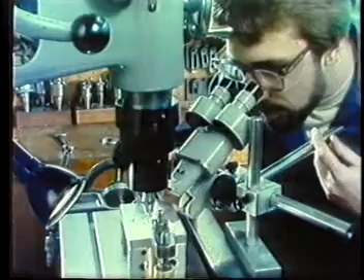Quality and productivity are the concerns of every industry, from the plants that produce our paper products to the companies that manufacture precision machine tools. All are affected by safety, quality, and productivity.

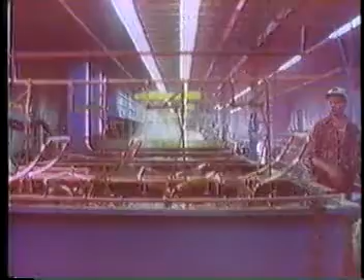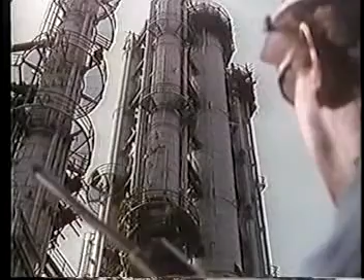Modern industries depend on the ability to measure and control scores of variables that directly affect plant safety, product quality, and operating efficiency. All major industries, from automotive and aerospace to the food and drug industries, rely on precise and reliable control systems. Production systems and their equipment vary greatly from one industry to another, and so do their control systems. A nuclear power plant must pay particular attention to plant safety, as must a steel mill.

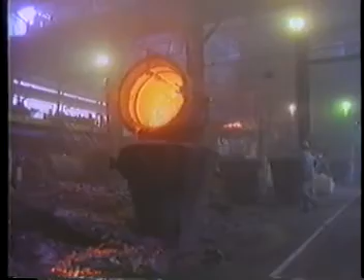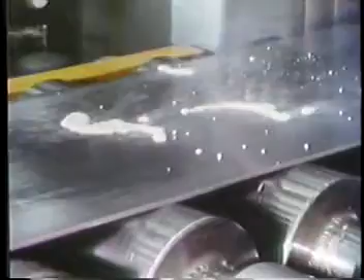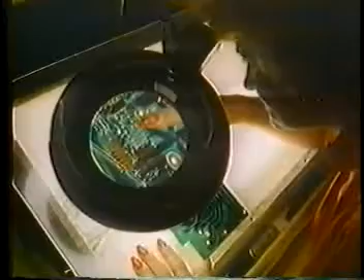A pharmaceutical company must maintain rigid quality control to ensure pure and safe products. These and other industries each have dozens of different production lines with rigid specifications for each and every product, requiring close control of many variables. In all industries, whether a plant is large or small, the measurement and control of manufacturing variables is the key to successful operations. The systems controlling these variables are known as automatic control systems.

The program, Basic Automatic Process Control, showed how a small chemical company used control systems to maintain the quality of its product while increasing production. Let's look at the manufacturing process and control systems it used.

The company's chief product was a specially blended liquid, which was sold in bottles. Raw materials were mixed in an inline mixer and passed through a heat exchanger, where the mixture was heated with steam to 80 degrees. This was the temperature required to ensure proper blending of the ingredients.

If, for some reason, the temperature rose above 85 degrees, one of the ingredients became overactive and the product was off specification. On the other hand, if the mixture was allowed to cool below 75 degrees, blending was incomplete and the product had to be reprocessed or thrown out.

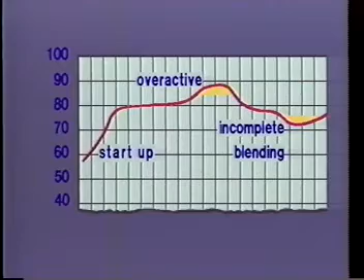In short, good product quality required that the temperature be maintained at 80 degrees, plus or minus 5 degrees. After leaving the heat exchanger, the blended product then flowed through a pipeline to two automatic bottling machines.

Temperature control was first attempted with an on-off controller, but on-off control quickly proved to be totally inadequate for the continuous process. The company then installed a proportional-only controller. The gain of the controller was adjusted so the control valve admitted the right amount of steam to the heat exchanger to maintain the desired temperature.

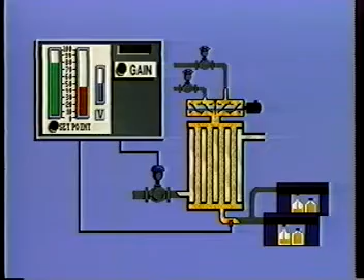This controller worked well until one of the bottling machines was started or stopped. These load changes to the system created temperature offsets, resulting in a loss of product due to temperatures that were either too low or too high.

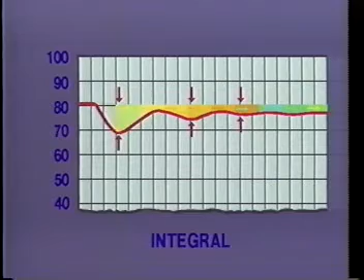An integral unit was then added to the controller. By responding to the duration of the temperature error, the integral unit detected that the error was still present sometime after the load change. The signals from the integral and proportional units combined to correct the error or offset.

Although the proportional integral controller worked well to eliminate offsets, its output signal did not react quickly enough to reposition the valve during sudden load changes. Each time a bottling machine was started or stopped, some product was lost.

A derivative control unit was then added to the controller. This unit could detect the rate of temperature change and cause additional valve movement whenever the temperature changed rapidly.

The control instrument finally used in the plant was a 3-mode controller known as a PID controller. It contained proportional action, which responded to the size of the error to maintain the system under most conditions.

Integral action, which responded to the average error over a period of time to compensate for load changes. And derivative action, which responded to the rate of change in the error signal to speed up valve action when fast load changes occurred. With the PID controller, the temperature of the product in the heat exchanger was maintained within the required limits.

The control system enabled the company to keep the high quality of its product, while it increased production by adding more production lines.

The story didn't end there, however. The product was so successful that soon other companies began producing and selling competitive products, and some of the competing products were priced below that of the original.

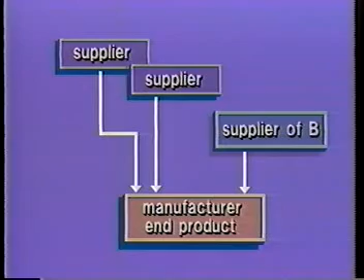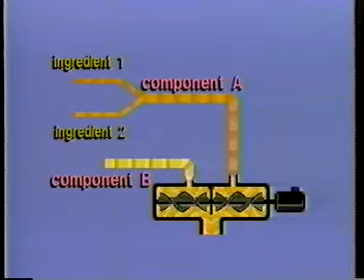This was their rationale. The company's product was made of two components, A and B. These came from two different suppliers, and they were mixed together in a blending tank before being added to the continuous reactor. Component A, however, was itself a mixture of two other ingredients, which an intermediate producer combined and sold by the tank load. If the company could make this mixture in-house, it could eliminate the extra expenses paid to the intermediate producer.

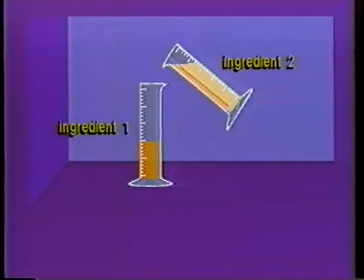The recipe for making component A was simple. It required 2 parts of one ingredient for each part of the other, a 2-to-1 ratio. Because the recipe was so simple, eliminating the middleman in the supply chain meant only a minor modification to the plant was needed. This is what the modification looked like: an additional pipeline was installed that intersected with the line that formerly carried component A into the mixer and heat exchanger. The two ingredients were then mixed together in the pipeline to form component A.

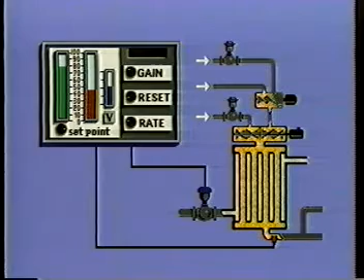The only problem was that the plant had to somehow make sure that twice as much of the second ingredient always flowed into the pipe's intersection. A ratio controller was used to make sure that happened.

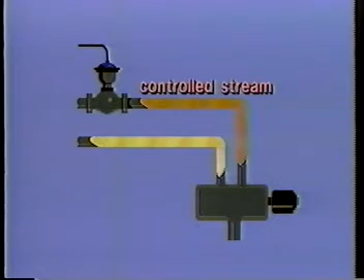Ratio control can be accomplished by controlling both streams, or by using one control stream and one uncontrolled stream. When using an uncontrolled stream, only one of the two flows entering a system is controlled by a ratio controller. It doesn't matter if the other flow varies, so this uncontrolled stream is known as the wild stream. In ratio control, the only thing that matters is that the control stream matches the wild stream in the desired ratio. In this case, the volume of product in one stream must be twice as much as in the other.

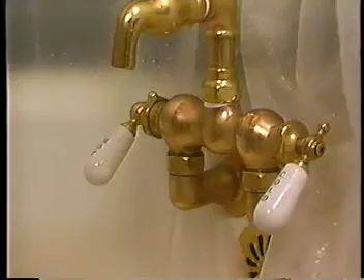Ratio control is a lot like staying comfortable in a shower. Both hot and cold water valves are opened and then adjusted to produce the desired water temperature. But if someone in the next apartment turns on the cold water, the flow of cold water into the shower suddenly decreases. To avoid scalding himself, the bather quickly reduces the flow of hot water into the shower head. In effect, he is trying to maintain the proper ratio of hot to cold water.

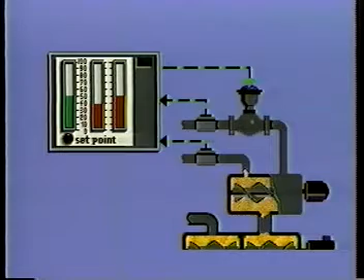A ratio control system accomplishes a similar adjustment automatically by using two sensors, a ratio controller, and one valve. A sensor in the wild stream transmits a signal proportional to the flow rate to the ratio controller. The flow rate in the controlled stream is compared to the flow rate of the wild stream, and the ratio controller maintains the controlled flow rate to give the desired ratio for the mixture. This desired ratio is determined by adjusting the set point on the ratio controller. A high ratio means that the difference in the flow rates is great. A low ratio means that the difference is smaller.

Here is how ratio control worked in the chemical plant. The flow of ingredient 2 into the process was continuous but variable. The flow of ingredient 1, however, was carefully controlled so that its flow was always half that of ingredient 2. For the ratio to be controlled, it really didn't matter what the absolute flow rate of the materials into the process was. It only mattered that this 2-to-1 ratio was always maintained.

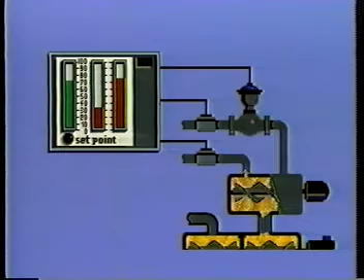The addition of the new ratio controller and an additional pipeline was not a very costly modification to the plant, and soon the company was enjoying the benefits of reduced materials costs. However, energy was another major concern, since energy costs were an appreciable portion of the total production costs. This made the cost of producing steam for the process a major expense, so the company next turned its attention to reducing energy consumption. Although the potential savings were not as great as those achieved in materials costs, the plant engineers knew they could conserve energy if they could reduce the amount of steam needed in production.

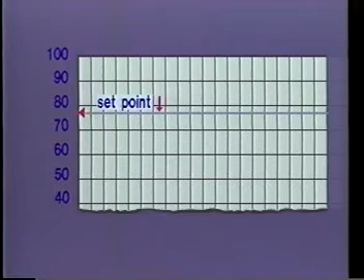One way to reduce steam requirements would be to lower the set point of the product temperature. However, this could only be done if the variations in temperature could be reduced. This temperature record shows why. First, the temperature record shows that the product temperature varies plus or minus 5 degrees. The set point is 80 degrees, and the temperature can go as low as 75 degrees without affecting product quality. But if the temperature could be controlled at plus or minus 2 degrees, the set point could be lowered from 80 degrees to 77 degrees. Product quality would not be affected, since the temperature would not fall below the lower limit of 75 degrees.

The plant engineers knew they could conserve energy and reduce costs if they could maintain the temperature in the heat exchanger at 77 plus or minus 2 degrees. Before they could do this, they needed to know what caused the temperature to change as much as it did.

Here is what they found out. The heat exchanger used in the process was a typical shell and tube type, in which the product flowed in tubes through a steam jacket or shell and was heated by steam within the shell.

The main cause for temperature variation was changes in pressure of the steam supply. As steam pressure increased, steam temperature also increased, and as pressure dropped, temperature dropped. Pressure changes occurred when other production lines in the plant increased or decreased their use of steam. When other lines decreased their use, the pressure of the steam supply increased.

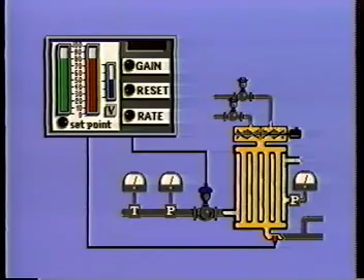The engineers felt that this was an ideal situation for cascade control. Cascade control involves using the output of one controller to provide an input to adjust the set point of a second controller. This second controller is part of a feedback loop inside the feedback loop for the primary variable.

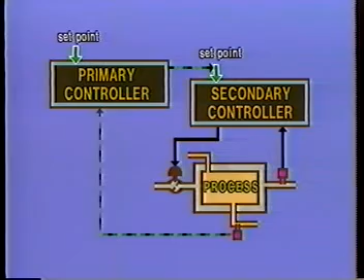Here is how the chemical company used cascade control to keep the product temperature closer to the set point. The steam pressure in the heat exchanger shell was monitored, since it rose or fell almost immediately if there was a change in the steam supply. The output of this pressure sensor went to a controller that caused the steam valve to open or close in proportion to the shell pressure.

This was the inner or secondary feedback loop. The outer or primary feedback loop still responded to the temperature of the product in the heat exchanger. However, instead of directly positioning the steam valve, the output of the primary controller was used to adjust the set point of the secondary controller. The secondary controller then positioned the valve.

Under most circumstances, the secondary loop was doing most of the work involved in maintaining a steady product temperature. Its major responsibility was to minimize disturbances in the steam line. In contrast, the primary loop's major control action occurred whenever there was a disturbance or load change in the product, for it was then that the set point of the secondary controller had to be changed.

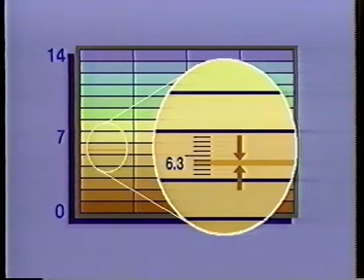However, while most of the company's engineers had turned their attention to saving energy, one enterprising young engineer had not. He was looking for further reduction in materials costs and was concentrating on component B. For this component, a precise pH value was necessary for good product quality. pH is a measure of the acidity or alkalinity of a substance. For component B, the ideal pH was 6.3, but a pH in the range of 6.2 to 6.4 was acceptable. If the material was too acidic or had a pH lower than 6.2, the product would become lumpy.

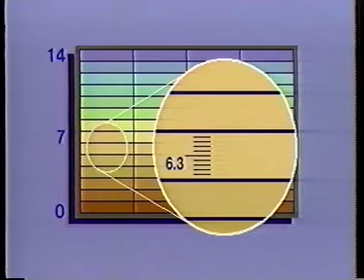If the raw material was too alkaline, with a pH higher than 6.4, the product would separate into layers after it was bottled. The supplier of component B had provided it within the acceptable range, but the enterprising young engineer soon found out it would be far more economical for the company to buy raw material with a pH in the range of 6.2 to 6.8.

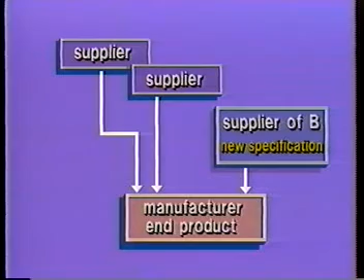All that was needed was a way to lower the pH when necessary. He determined this could be done quite easily. First, a standard pH instrument could be used to determine the exact pH of component B. Then, if the pH was above 6.3, acid could be added until the pH registered 6.3. Since the acid required was inexpensive and only small amounts would be needed, the company would be able to pay off the cost of minor plant modifications quickly.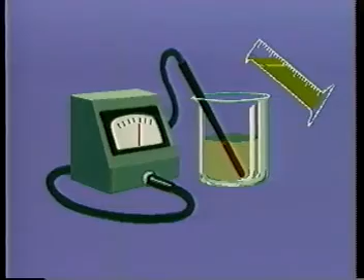The modifications needed required a control system to monitor and adjust the pH of component B. Once the president of the company heard about this opportunity to make further savings in materials costs, he quickly approved the plans for modifying the plant and the supply of component B.

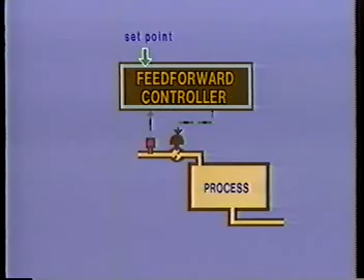The control system the company chose as part of this modification was a feed-forward control system. In feed-forward control, a disturbance is detected before it has a chance to affect the process, and corrective action is taken before the disturbance creates an upset in the process. This type of control is known as feed-forward because it takes corrective action before a disturbance affects the process.

In contrast, feedback control takes corrective action only after a disturbance is detected in the process. Feedback control is something like driving a car down the road by looking only through the rearview mirror. After the car has bounced off a curb, the driver turns the wheel after observing what he has just hit.

Feed-forward control is more like the usual manner of steering. Objects can be dodged before a collision occurs, since they are spotted through the windshield.

In the chemical plant, raw material was going to be accepted with a pH in the range of 6.2 to 6.8. The process required the pH to be between 6.2 and 6.4, so any variation in pH above 6.4 was a disturbance to the system that had to be corrected by adding an acid.

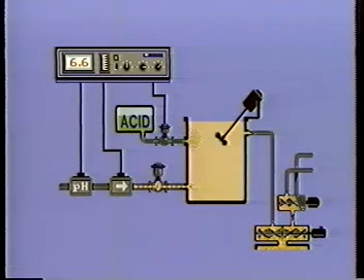With feed-forward control, it was possible to monitor the disturbance variables before they entered the reactor. A pH instrument was used to monitor pH, and a flow sensor was used to measure the flow. The feed-forward controller calculated the amount of acid needed to control pH at a desired value based on flow and/or pH disturbance. The output of the feed-forward controller positioned the valve to admit the required amount of acid to the stream to maintain the pH.

In this configuration, when the pH of component B was 6.4, only a small amount of acid entered the flow. When the pH was 6.6, acid entered the flow at a greater rate. And when the pH was 6.2 or 6.3, no acid was added. Also, when the flow rate changed, the amount of acid added was adjusted to accurately maintain the pH.

For two days after startup, the new system performed exactly as planned. The pH sensor worked, the flow sensor worked, and the valve adding acid opened and closed as necessary. The quality of the finished product was as high as ever. But on the third day, something went wrong.

The product bottled that day stratified, or separated into layers. That meant the product was too alkaline, which in turn meant that not enough acid had been added to maintain the pH level. Worst of all, it meant that the entire day's production had to be thrown out.

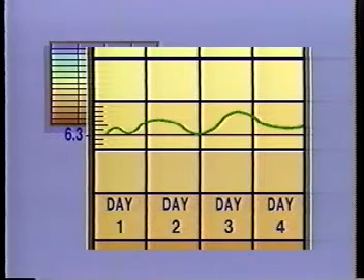The numbers used to describe the acidity or alkalinity of a substance follow an ordinary number scale, ranging from 1 to 14. This would lead one to expect that a substance of pH 2 would be twice as alkaline as a substance with a pH of 1.

In fact, the substance with a pH of 2 is actually 10 times as alkaline as the substance of pH 1. Each number on the pH scale indicates a 10-fold change in the acidity or alkalinity.

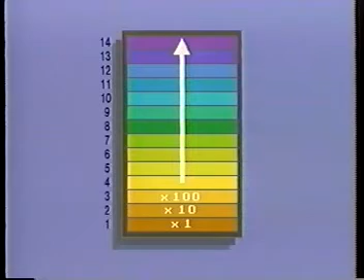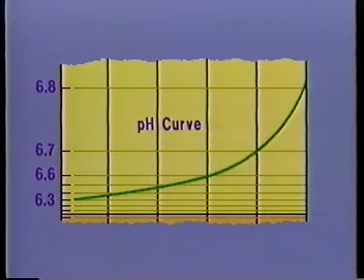A graph of pH and the amount of acid needed to neutralize it looks like this. This graph shows a curve rather than a straight line. Between pH values of 6.3 and 6.6, the curve is fairly straight and flat. Between pH values of 6.6 and 6.7, however, the curve begins to rise more steeply, and it continues to rise steeply up to pH 6.8. Because this graph does not follow a straight line, neutralizing pH is a non-linear process.

What had happened in the plant was that the controller worked well to add the correct amount of acid based on the pH of the raw material and the flow rate. But the raw material was still more alkaline than the specifications allowed, even after the acid was added. This was caused by variations in concentration of the acid additive, which was a disturbance variable not measured in the feed-forward system. There was no signal to the feed-forward controller indicating that the pH of the mixture was still too high.

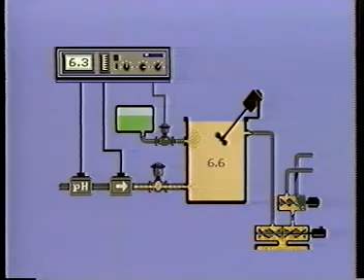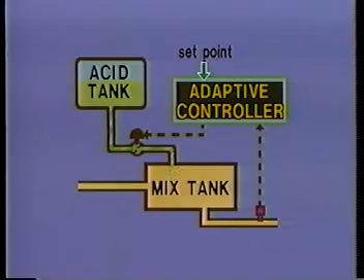Fortunately, there was a way to solve the pH problem. This was done by adding a feedback control loop to measure the pH of the product in the mix tank and make additional adjustments if required to bring the product to specification. The feedback loop included an adaptive controller to correct for non-linearities in the disturbance variable. An adaptive controller was used since pH response is non-linear, and an adaptive controller can automatically adjust its response to compensate for non-linearities in a system.

The addition involved adding a second pH instrument downstream of the mix tank and an additional acid supply line. If the concentration of the acid additive decreased, the feed-forward controller could not detect the decreased concentration and adjust to add additional acid to compensate. However, a downstream pH instrument would detect a pH error.

The error signal caused the adaptive controller to adjust its action based on the size of the error and position the valve in the second supply line to add enough acid to compensate. Acid entered the mix tank in greater volume until the error was corrected.

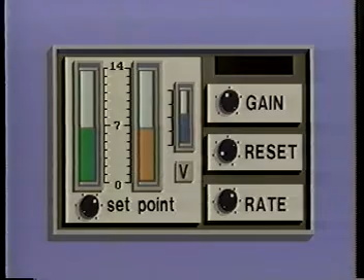Some years ago, this would have meant that a plant operator would have to continuously monitor the pH and adjust the controller whenever the pH went over 6.4. But now, with the aid of microelectronics, it's possible to use controllers that will automatically adjust gain, reset, or rate to compensate for non-linearities. The controller contains a small computer, which is programmed to change the controller's response when an error is not corrected at the current setting. Because the controller adapts its response to a change in conditions, it is known as an adaptive control system.

Adaptive control is typically used in situations where the process gain is non-linear, just like our example of a pH process. In practice, feed-forward is rarely used alone because there is no means of verifying that it is performing as desired. In the chemical plant, a feed-forward loop with adaptive control was added to monitor the pH and compensate before a variance could introduce a disturbance in the process. Feed-forward control maintained the pH at the proper value most of the time, but the feedback control loop was needed to correct for any deviation in the required pH.

We've now seen how the chemical company's control systems have evolved along with changes in the production system and, indeed, along with changes in the business environment. These systems have evolved from the basic feedback system using a PID controller to include entirely new control concepts.

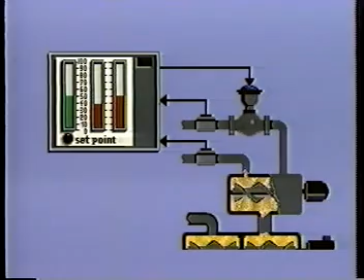First, with ratio control, input from one flow stream was used to adjust another flow stream, maintaining a constant ratio between the two streams. Second, with cascade control, two feedback loops, one within the other, were used to minimize temperature variations. Third, with feed-forward control, disturbances in pH were compensated for before they had a chance to affect the system. And fourth, with adaptive control, a controller adjusted its response automatically to compensate for non-linearities in the process.

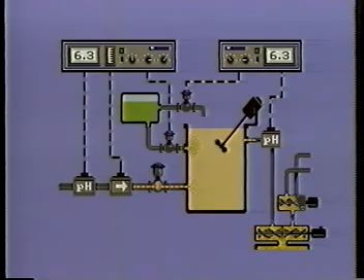With the help of these new control concepts and their respective control devices, production was maintained with consistent high quality, and the plant maintained product quality at a high level of productivity with considerable cost savings. The chemical company was again outpacing the competition in sales.

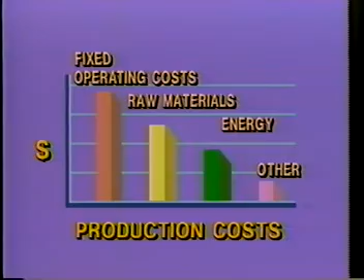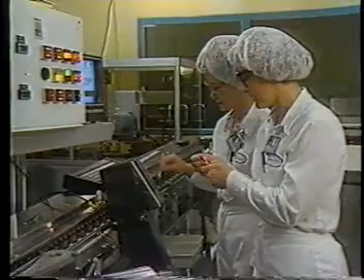Other companies are likewise enjoying the benefits of advanced control systems. Whether it is the ratio of decongestants to antihistamines being made into cold medicine, the pressure and temperature in a nuclear reactor core, or the amount of bleach added to paper pulp, these and other manufacturing variables are controlled with advanced systems similar to those we've seen in our example.

In any case, whether a plant's control systems involve ratio, cascade, feed-forward, or adaptive control, these advanced control systems play a major role in promoting safety, quality, and productivity.